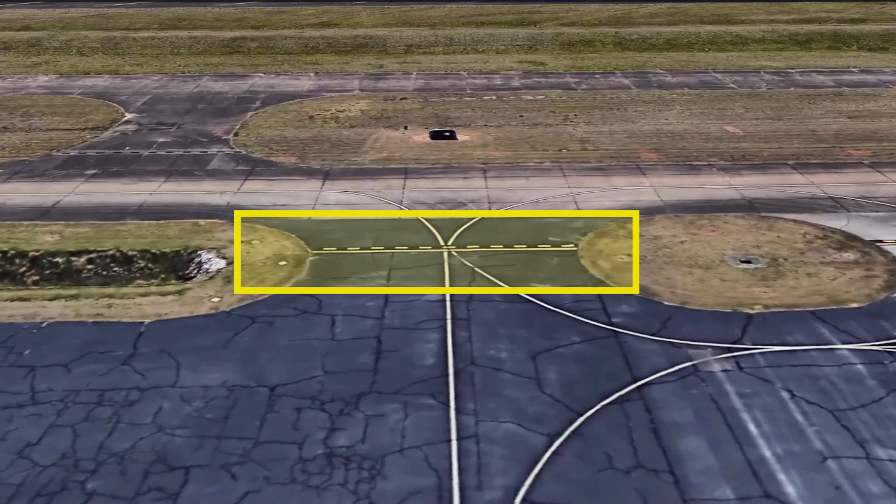Let's start with this one here. So you taxi up, and we'll keep saying this is Taxiway Juliet. What do you have to hear in order to cross that line? You need to initiate the actual action with the ground and get permission. You would need to hear cleared to taxi via Juliet to runway, whatever runway you plan on taking. Correct. They don't typically use the word cleared except for taking off or landing or something similar. But they would say taxi via Juliet, runway 27.

If this were runway 27, I haven't labeled it, but I think that'll make sense from the video. We'll say north is up, so 27 makes sense. So once you're told taxi runway 27 via Juliet, you would read back those instructions, taxi 27 via Juliet, and now you're cleared to taxi up and along. At that point, right, you would have permission to enter that taxiway. Okay. You come up to this marking. It looks like this here. I didn't do the best job drawing it. Can we cross this thing?

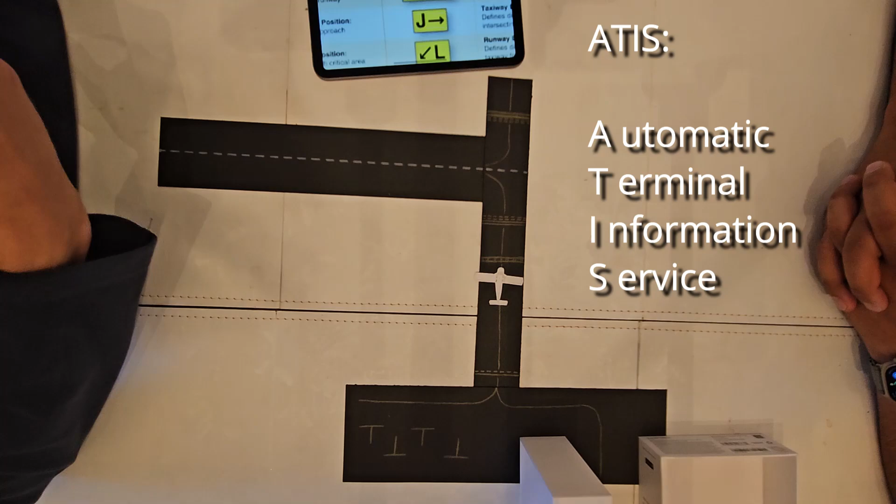No. It depends. Most airports have an ATIS. Stands for Automatic Terminal Information Service. Okay. It's not really automatic. Someone reads it and then it's played on a loop. On a loop. At Donaldson, we don't have one during the day. When the tower's closed, there is an automated AWOS, Automatic Weather Observation System. Though at most controlled tower airports, we do have an ATIS.

And at the very end, they're going to talk about which runways are in use, and then listen if they say visual approach is in use or ILS approach is in use. If you hear that term, ILS approach is in use, you may not cross that line. Okay. Because this is an ILS critical area. The way an ILS works is there's an antenna way down here at the other end of the runway. It sends a beam like this.

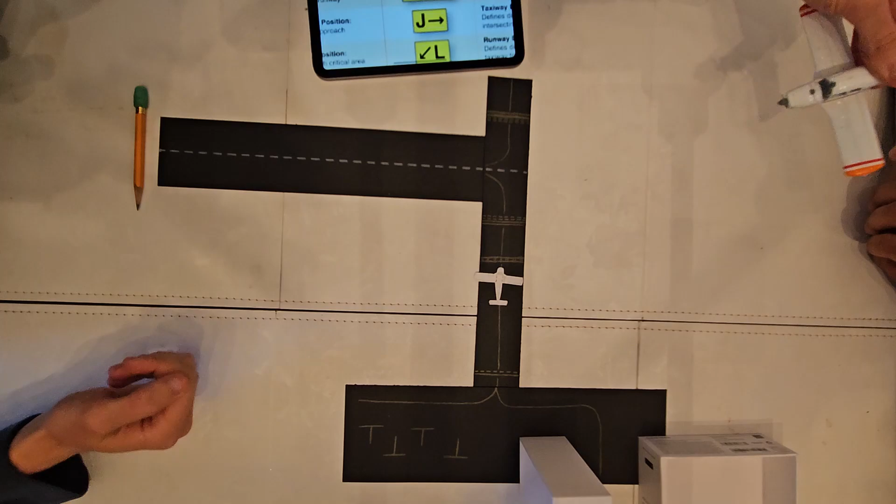So if you have another airplane coming in to land and you were to taxi into this area, your tail fin could block the signal going to them and give really strange readings on their instruments. Oh, wow. That's very interesting. So that's what the ILS critical area is for. But if you do not hear ILS approaches in use, they're not using the ILS. Right. That's interesting. I don't know that I've seen that before. Yeah, they're pretty rare.

I don't see them very often, but Concord does because it has a really long, skinny runway. And remember that this antenna is right here. There's the actual localizer antenna. If you've seen this truss structure at the end of a runway, that's the localizer. And you can see why they might want to put a restriction on that, because that beam is coming this way for the people landing this way.

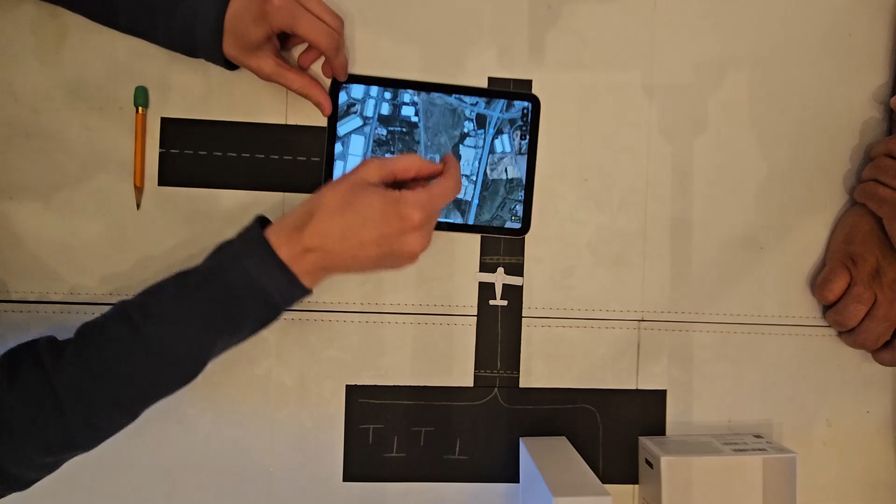I gotcha. So way out here, that beam starts to cross the runway. So an airplane anywhere along here could be a problem if an airliner or someone IFR is trying to land this way. If it's a cloudy day and it's pretty low conditions and you think someone could be using the ILS, it doesn't hurt to ask the tower. Okay. Even if you did not hear ILS approaches in use. Is the ILS typically only on one runway?

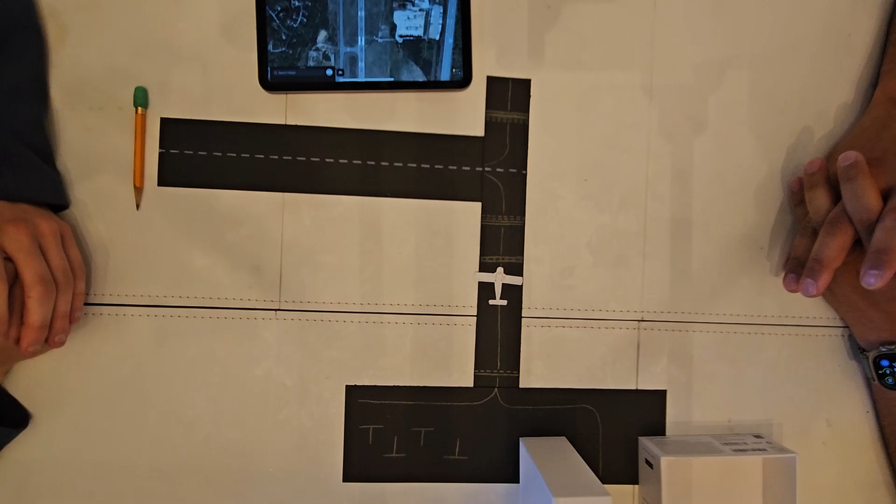It depends. So at Charlotte Douglas, if we go over there, they have them in both directions. There's a localizer antenna there. See all those little things? So that's for this runway, landing south. But they also have one on the north end for landing north. So they have different frequencies and they cross each other, which is kind of cool. That is very cool, depending on your weather and whether or not you would need that. It does depend, but it is nice having an ILS on both runways.

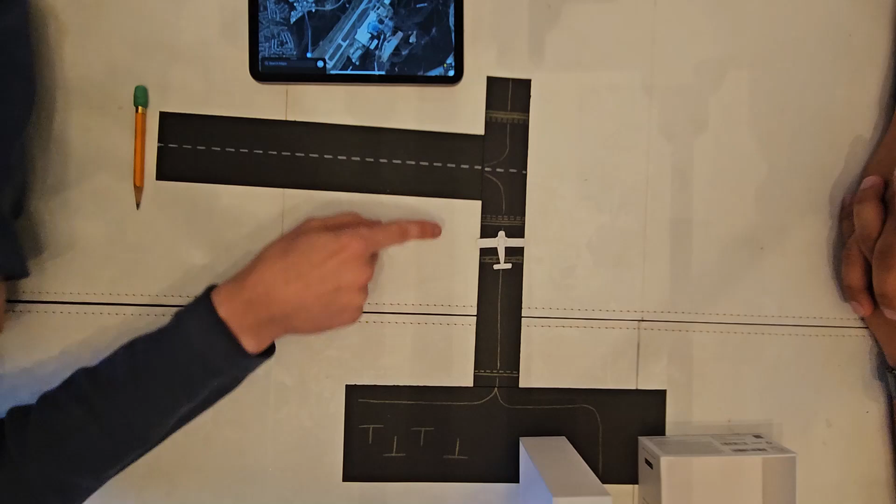Although a lot of these smaller airports that we're flying in and out of just have one. Greenville Downtown only has one. So if the weather is really clear and you do not hear ILS approaches in use, you're fine. You can go right over that ILS critical area. Otherwise, ask. So you're going to hear that on the ATIS, correct? Yes, on the ATIS when you get the weather. You would hear ILS or visual approaches in use, or maybe RNAV approaches in use.

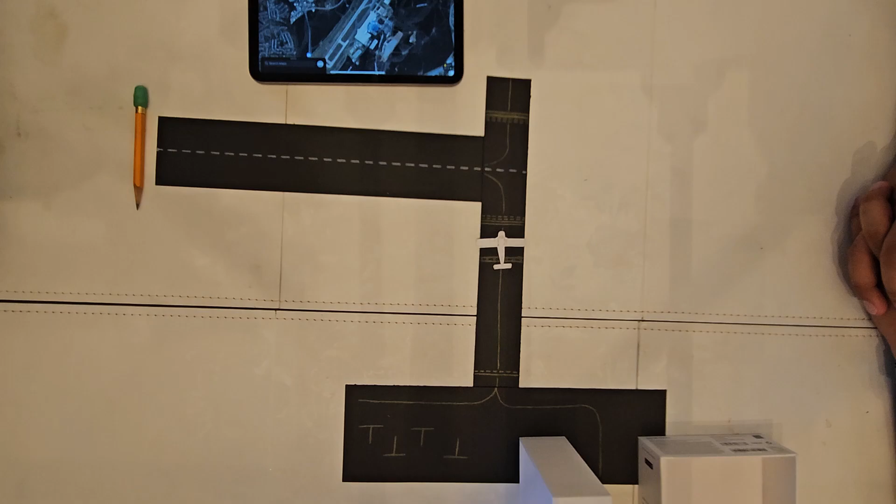If they say RNAV approaches in use, I'd still ask, because that's still instrument things going on. Because even if they're defaulting, that's telling the airplanes that are arriving what to expect. Expect an RNAV approach, but they could still ask for an ILS. And then you being in the ILS critical area could be a problem. So I would just ask if it's instrument conditions or instrument approaches of any sort are happening.

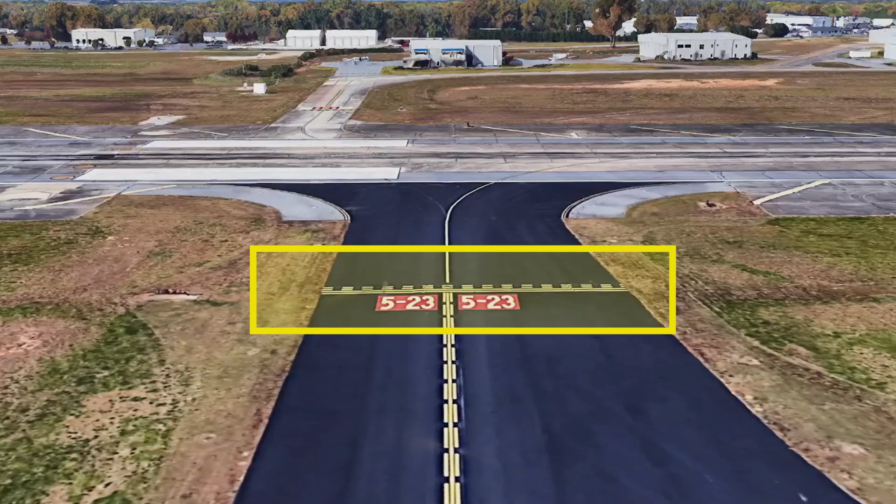We come up to this line. Can we cross that? No. What do we have to hear to cross that? Cleared. Cleared for runway. Very good. The only exception to that would be to cross the runway. If they say cross 23, you are good to go ahead and go across. But if you were going to be on this runway, you need to hear cleared for takeoff or cleared to land, or cross. They all start with C. So if you don't hear cross or cleared, do not touch a runway.

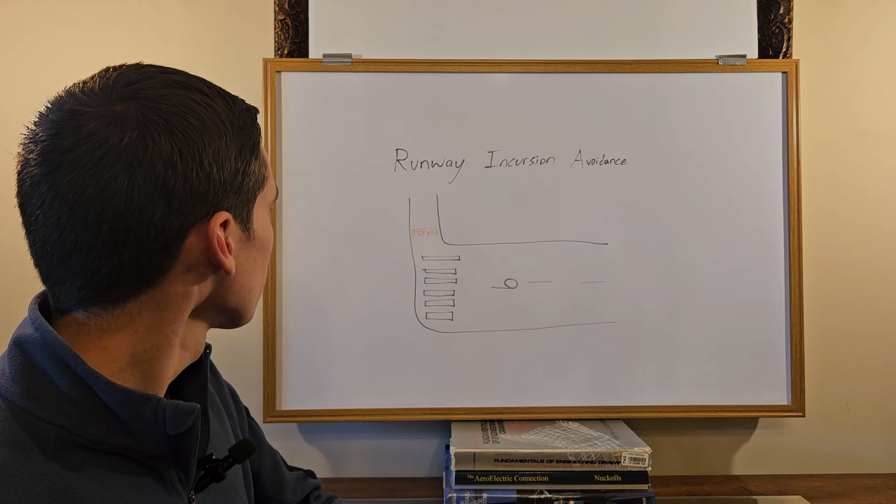Now, one thing I forgot to talk about was a line up and wait clearance. That would be where an aircraft is holding at this position. They call for their takeoff clearance, or maybe the tower clears them. But instead of hearing Cherokee 12345 cleared for takeoff runway 9er, they hear Cherokee 12345 line up and wait runway 9er. This is an interesting clearance that I'm not a huge fan of. I understand how it helps with traffic flow, but be on very high alert, be very careful.

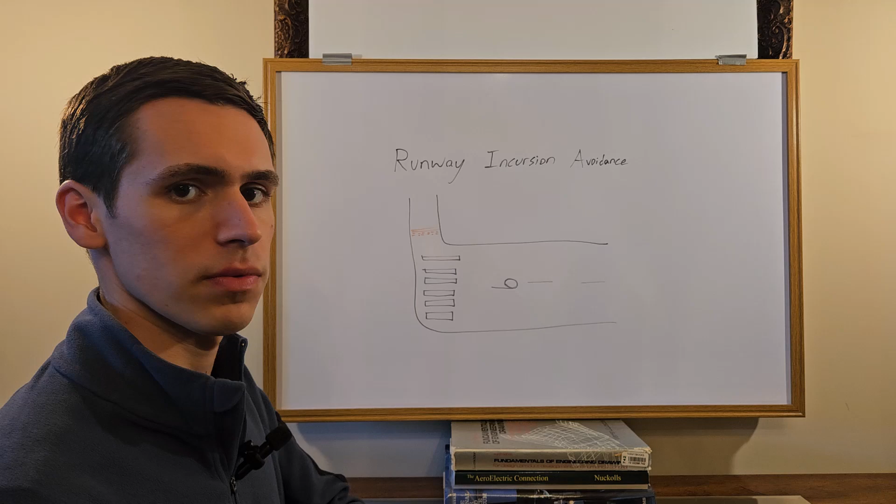What you are expected to do is taxi onto the runway, line up, and then stop. You are not allowed to take off until you receive your cleared for takeoff runway 9er. Until you hear that, you are to stop on that runway and not move. Now, it's rare, but it has happened that an air traffic controller forgets about the aircraft that has been told to line up and wait, and then clears another airplane to land behind them.

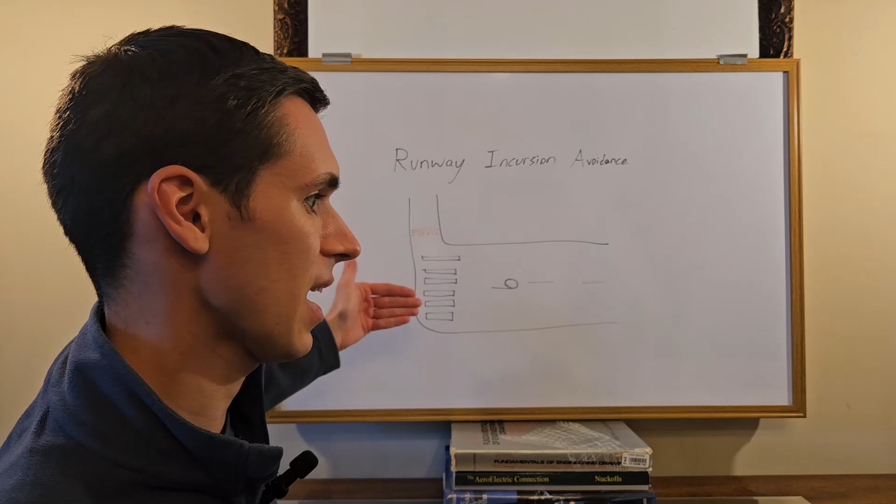When you have been given a line up and wait clearance, look both ways, especially on final. Make sure there are no other airplanes coming in to land. Also pay attention to how long you've been waiting. If you've been sitting there for more than a minute, maybe 2 minutes, it's time to ask the tower what's going on, or just confirm: you want Cherokee 12345 to continue holding on runway 9er?

And this is especially true if you hear someone cleared to land or know that there is someone behind you coming in to land. You might want to get off that runway in a hurry. So just something to be aware of. Have the situational awareness to know that you don't want to be sitting on this runway for too long. And if you've been cleared to line up and wait, just expect a takeoff clearance very soon. If you don't receive it, ask, because that could turn ugly quickly if you don't.

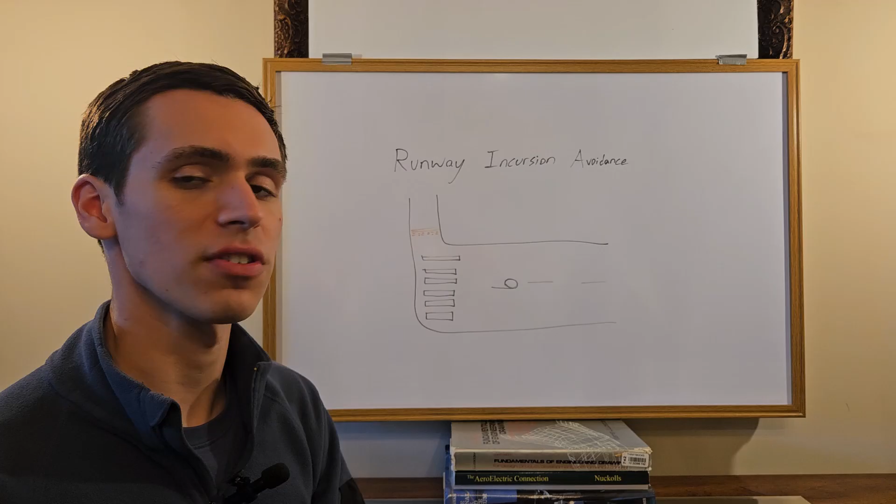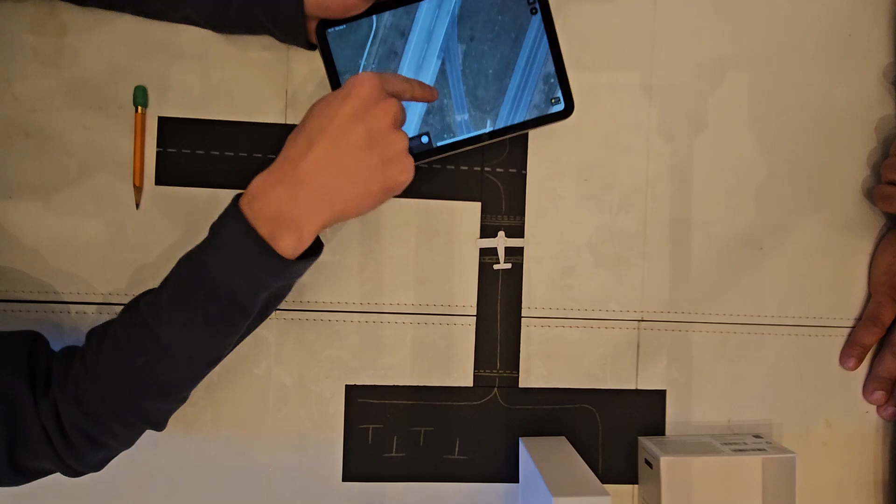And also notice the color changes. We have yellow markings for taxiways and white markings for a runway. So if you're seeing white markings, you're on a runway. So be aware of that. I mean, you can even see it on these here. See, it's all yellow. Yep. Wow, it's crazy. Something you look at all the time, but you don't think about it. No. But it's all there, which is really nice.

Now, technically, the runway starts anytime across this hold short line. So this little bit of the taxiway is still considered part of the runway. You need that cleared for takeoff or cleared to land or cross the runway to be able to enter this part. When you cross a single, you know you're getting onto a taxiway. Okay, yeah. When you cross a double, be double alert because you're getting onto a runway. Got it. Those are the 3 levels of security at an airport, at least as far as clearances are concerned.

Ramps are pretty much uncontrolled in the U.S. So you can taxi around, run your engine, whatever you want on a ramp. You're pretty much fine. Just, obviously not illegal things, but you get what I'm saying.

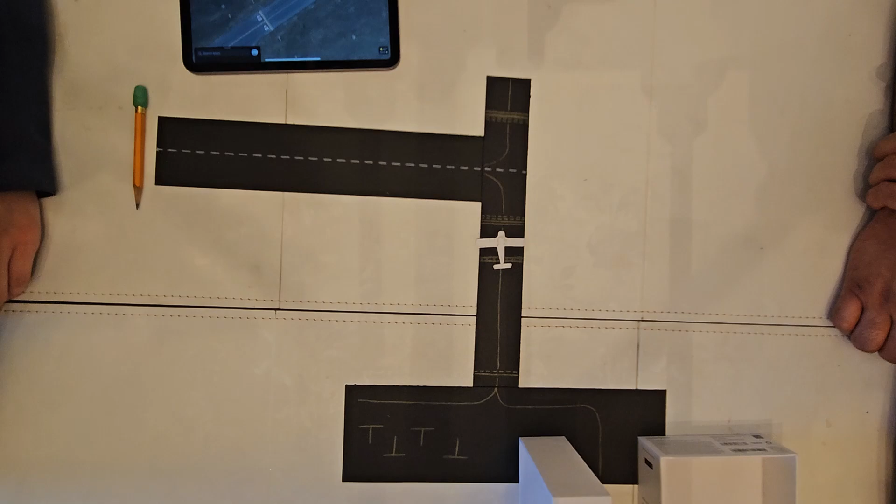Apparently, in some other countries, it is not that way. I had a pilot come and fly with me who did her ratings in one of the Caribbean islands. I don't know which one. But you had to have clearance to start your engine. You had to turn on the avionics and battery, call the tower, ask for permission to start your engine on the ramp before you could do it. Oh, wow. That kind of takes the fun out of it. It does a little bit. But in the U.S., no, that is not the case. You can go ahead and start your engine whenever you like, pretty much. Just make sure there's no one in the way of the propeller or behind you. Things like that, but that's for another. As far as clearances are concerned, you're good on a ramp.

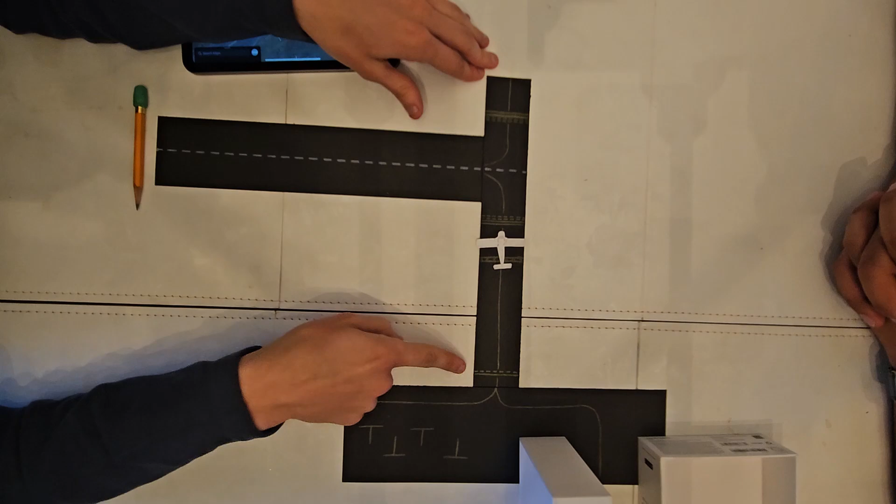It's uncontrolled, pretty much. Now, as soon as you cross this line, you are now on a taxiway. In a taxiway, you do have to have permission to be there. And just tell the tower what you're doing. If you just want to taxi around for practice, you can tell them that. Hey, I'd like some taxi practice. I just want to taxi up this taxiway and then back down. They can say no, but a taxiway is lower stress than a runway. So we're cleared for takeoff. Now we're allowed to taxi onto this. And we take off. Okay.

When we are cleared to land, we're allowed to land, and let's say we land this way. Do I need clearance to cross the dotted side of a hold short line? No, you do not. You need to get off that runway as quickly as possible after you land because it's a secured area. You were cleared to land, and now that you have landed, get off the runway. You're at the limit of your clearance, so to speak. And make sure the entire plane is across that line. A lot of people will stop with their tail still sticking over. Well, I'm across the line. Yes, in the cockpit you might be across the line, but if any part of the plane is still over that line, that's a problem. So you need to get across the rest of the way.

One of the best things you can do is tell them before you land where you're going. Okay. Please don't be the guy who lands at an airport. I'm going to... I don't know where I'm going. Where can I get fuel here? I've heard it happen too many times.

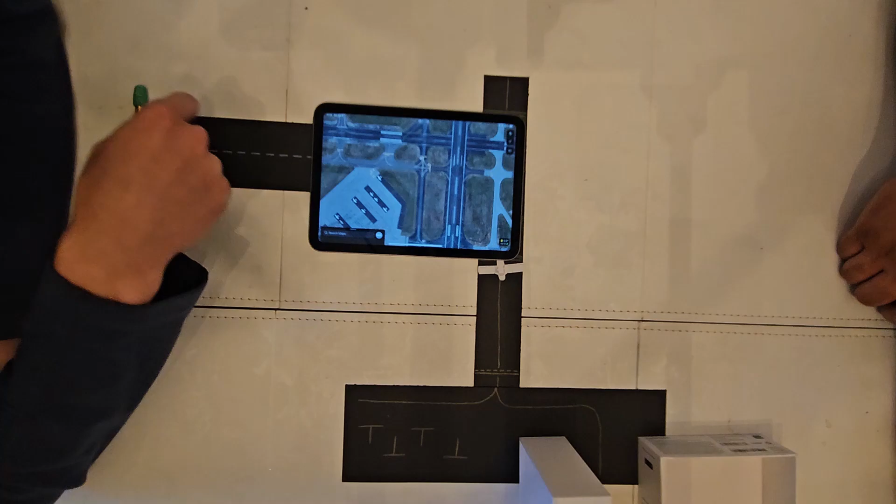Please don't be that guy. Get off the runway. Know if you're going to turn right or left at the very least. Know if you're making a right or left turn. Fuel at the Greenville Downtown Airport is almost exclusively on the west side. Okay. So if you're landing 19, you should be making a right turn at the very least.

The other thing you can do in ForeFlight, go to FBOs. Those are your fixed-base operators. That could be people where you get fuel, maintenance. There's a lot of options here. So Above and Beyond, that's a maintenance place. PF Flyers, they do avionics. Oh, it's there. Special Services, they do maintenance. Touch and Go does maintenance. That's a flight school. There's a flight school. But know which one you're going to, and there are your options.

Now, a lot of people know that there's a restaurant at the downtown airport. I heard about that. But you don't see it listed here. So that's where you're going to need to pull out your Apple or Google Maps and Google, where is the restaurant? Know what part of the airport it's on. Right. And then it's a good start. Plan your taxi route accordingly. The restaurant at the Greenville Downtown Airport is right here. So looking at it with north up, that's in the bottom left corner.

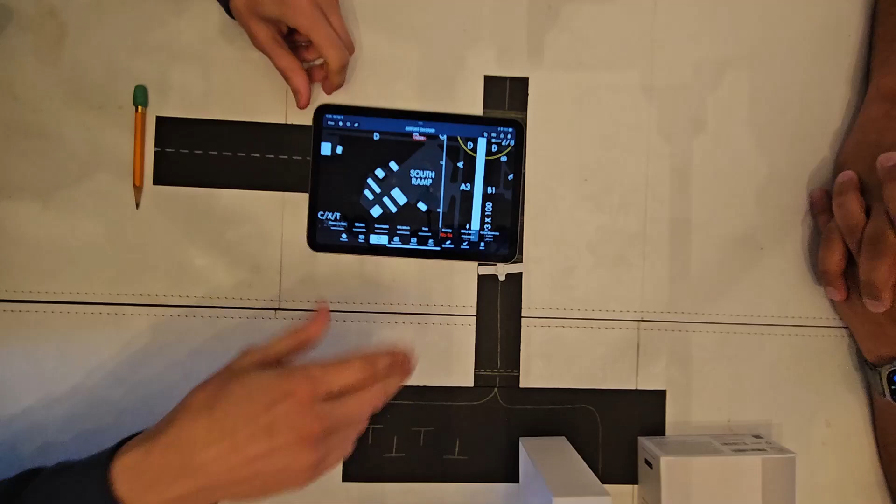Okay, let's go over to the airport diagram and see if we can find it. Bottom left corner. It's probably going to be on the south ramp. I can at least narrow it down. Figure that much out. It is that building right there. Right. It should be marked for how many people fly into downtown to go to the restaurants.

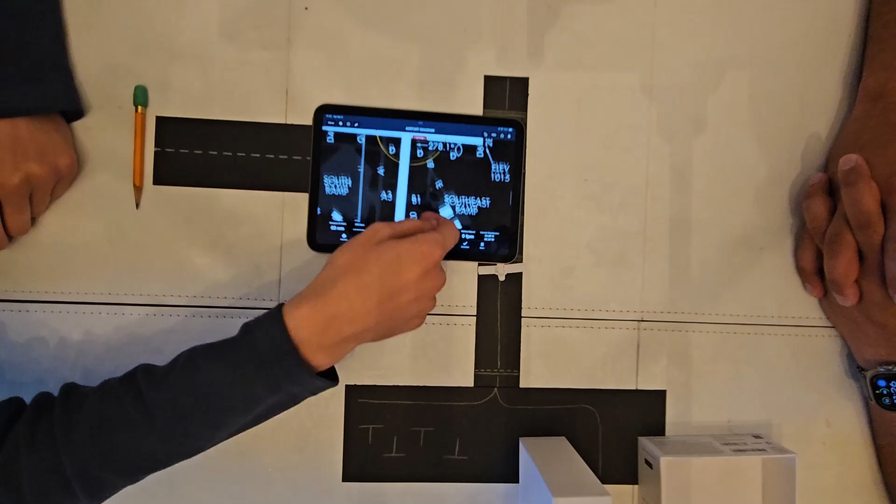Have a basic idea of where it is so that you can get off the runway on the correct side. If you're landing 19, it is the right side, but if you're landing 1, it is the left side. Okay. Don't turn off right landing runway 1 and be over here at the southeast ramp. I need to get to the restaurant. Oh, no. You have to be taxied around, across the runway. It's just waiting for the long line of airplanes to land who are also going to the restaurant, lining up behind you, also turning off the runway. Just, oh, man. Don't be that guy.

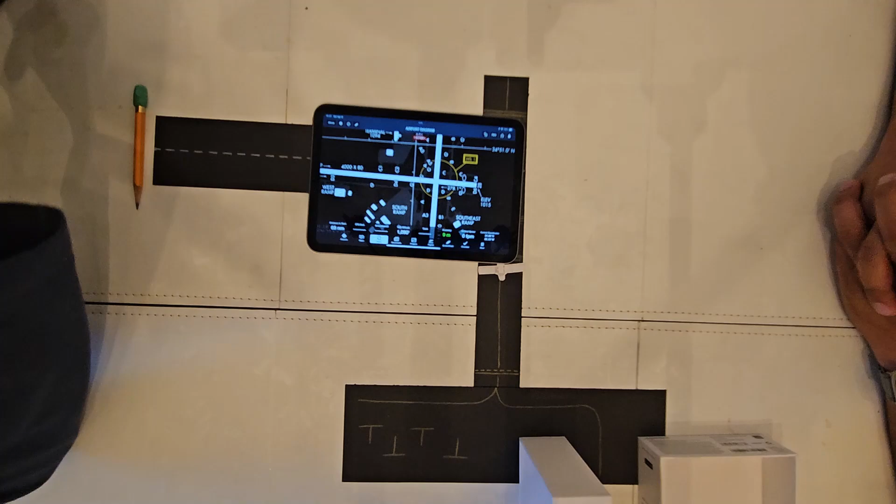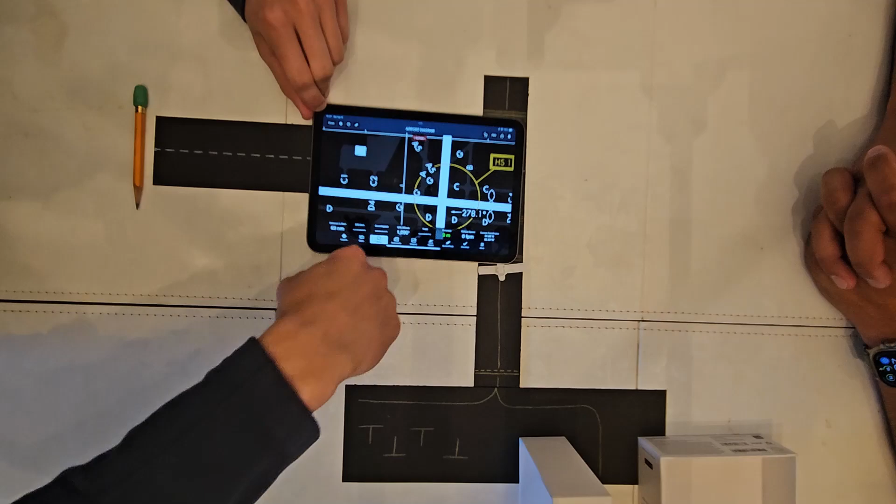Now, I see something else interesting on here. There's this HS1, and they're circling this. HS stands for hotspot. It is a place where there is a history of frequent confusion. Runway incursions or wrong taxiway events are frequent in hotspots. For example, people being told to take taxiway Golf might take Alpha 5, because taxiway Golf is a pretty hard turn. You're taking Alpha 5 and then it's a hard left on Golf. Right. But you could see how someone would be confused to see the Golf sign and just keep going straight into the jet center, when really they want to take Golf this way.

Another thing I've seen people do is land, told to make a left on Delta, but they make their left turn on the runway. Oh, man. Don't do that. That is a runway incursion. Follow a yellow line off the runway. Okay. If you don't see a yellow leadoff line, it's probably not a taxiway that you're seeing, especially if it has white lines. Oh, no.

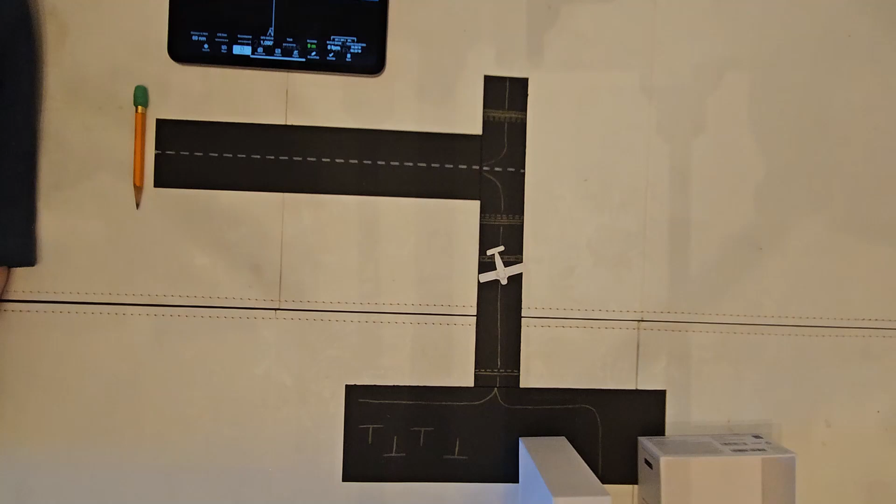I did have one student who, in one very specific situation, made that mistake because I had taught him only to follow the yellow lines. It had just poured rain. The rain was gone, it was good, but the sun was setting. So the light was reflecting off the water and you could not see a single mark on the ground. So that's where I failed as an instructor, because I didn't give alternative ways that would work in all situations. So we learned from that, and use your signs too. So you see the yellow Delta sign, you're going to turn at the next immediate turn just after that sign.

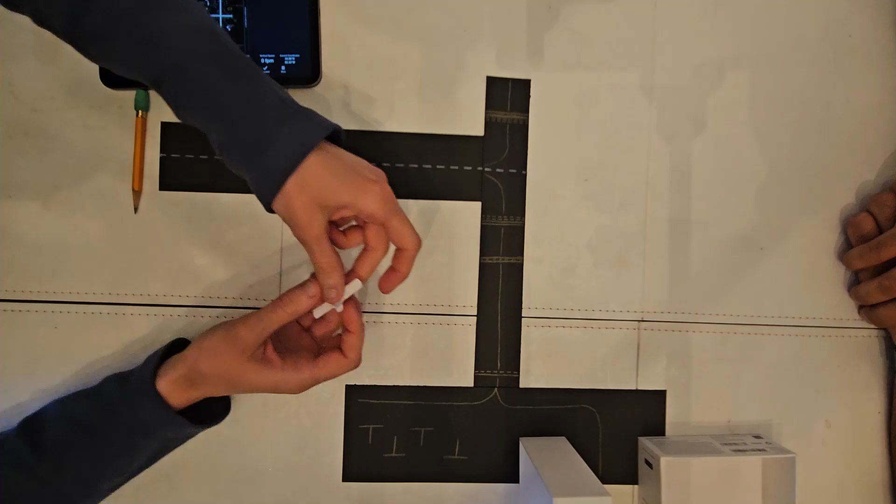That's a lot of the rules there. Don't cross a solid line unless you are absolutely sure that you have permission to do it, or ILS approaches aren't in use in the case of the ILS critical area. But when it comes to getting off the runway, get off as quickly as possible, and then stop the airplane and figure out where you're going and get your clearance to go to the ramp.

Okay, so let's go over some of these. So we have this sign here that says 4 and 2-2. So if we have a runway in front of us, and then the taxiway as well, we're coming off the ramp.

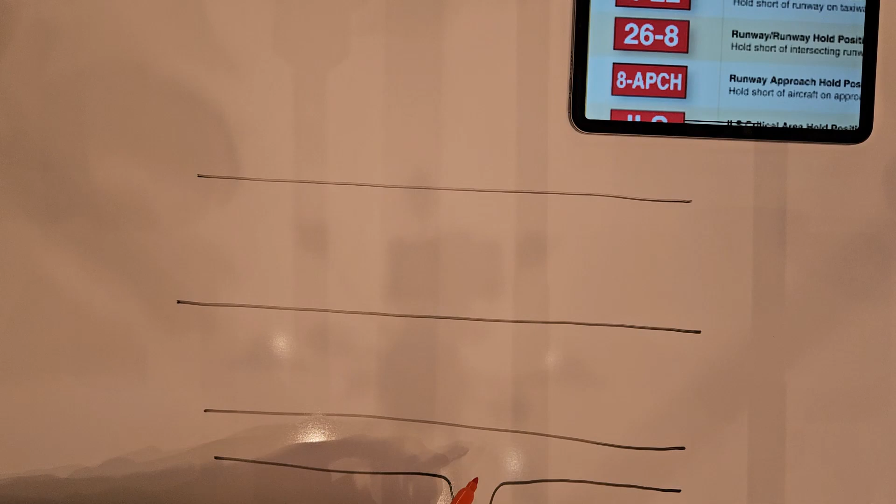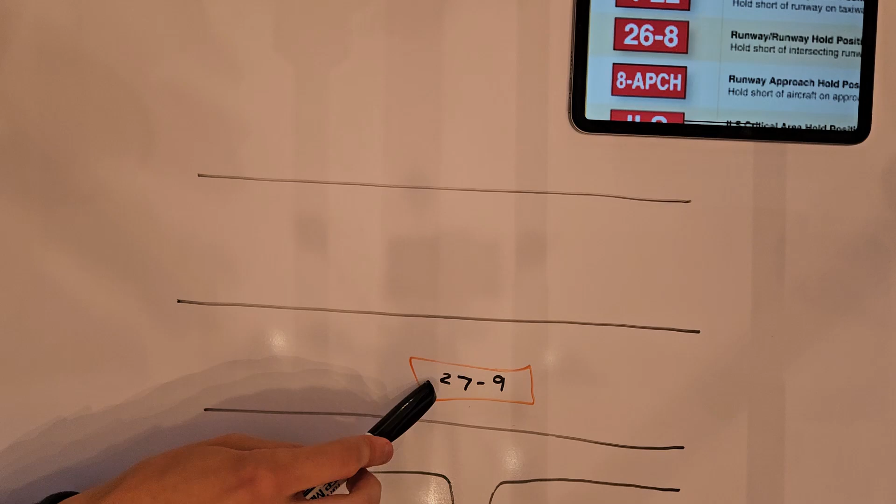And I'll use orange just because it's very hard to see yellow on a white background. It's a very light color. Which way are you going to turn if you're told to taxi to runway niner? We'll be making a right turn on whatever taxiway that is. They always put the runway number on the side of the sign where you need to go. So if it's a right turn to go to 9, you'll make a right turn, and they'll put the 9 on the right side. And if the 27 is on the left side, you know it's a left turn to go to 27. So it's not always written in numerical order. It's written in the way that you'd want to turn to go there.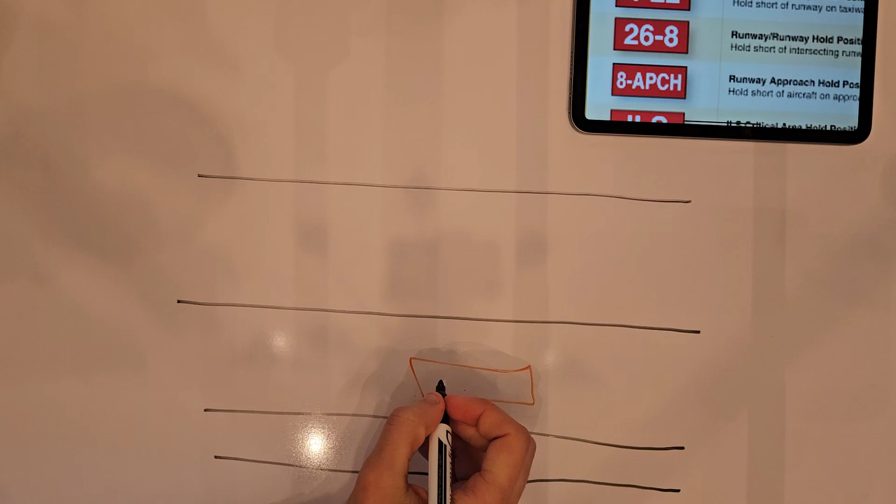Okay. All right, what if we saw it looked like this? There we go. That's a yellow sign. What does that mean? 27 left and right. That is something that I have not ever had to. I've heard it before, but I'm not familiar with what that means. That's fine. That's exactly what that dot means. And both of those runways are that direction. It'd be a left turn to go to 27 left or 27 right. Okay. So there's 2 runways in that direction. What is that? Just if you can do a...

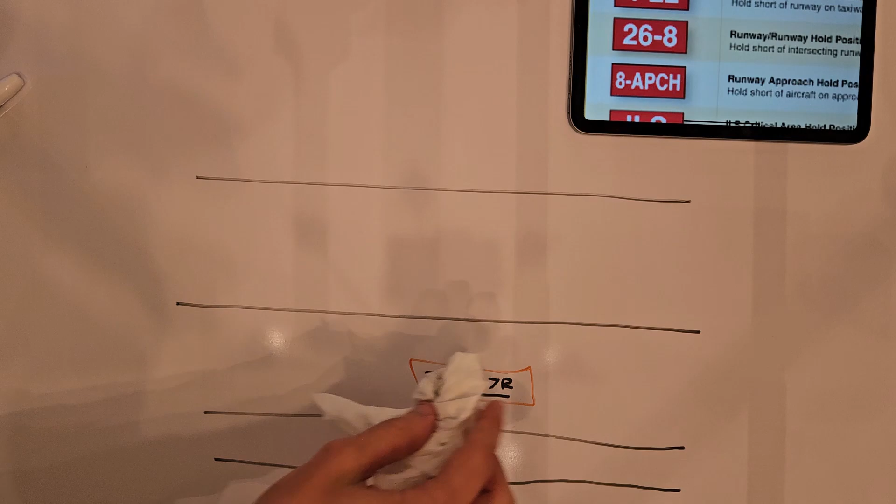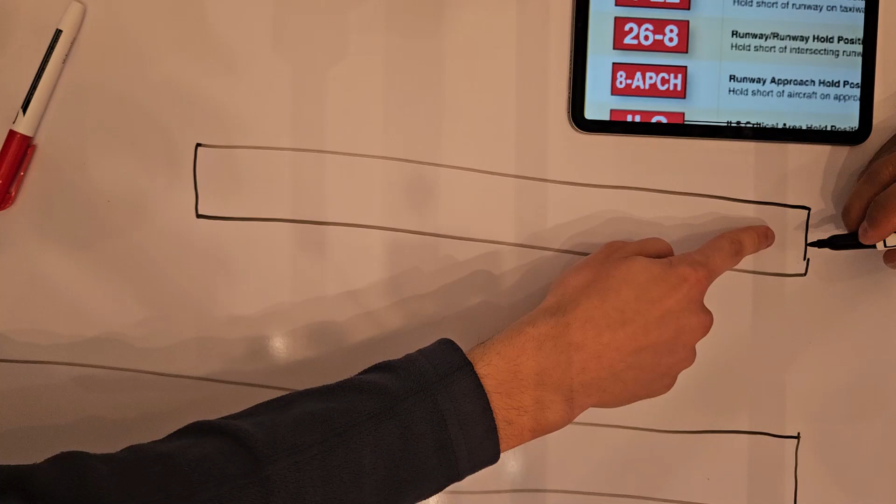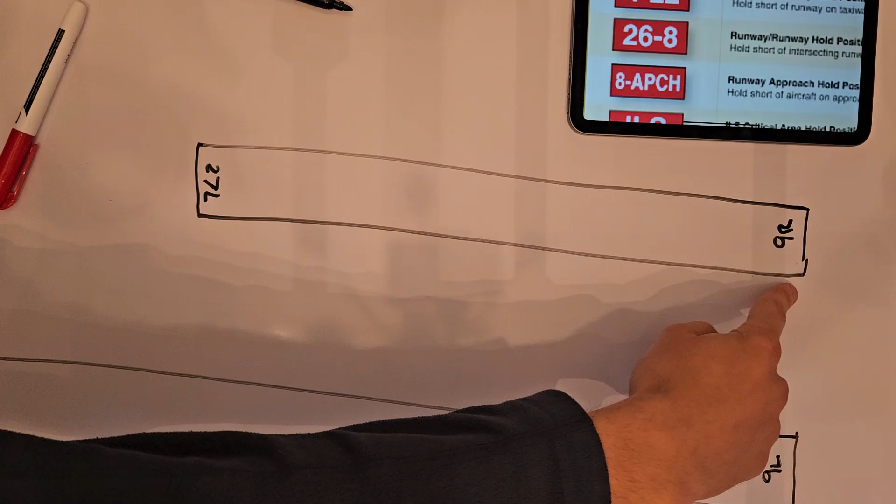Oh yeah, let's talk about parallel runways. That's a lot of fun. Okay, so it is parallel. They're not always exactly the same size. Sometimes they vary in size. Could you write number 9 on there? And would that be left or right? This would be right. That'd be 9 right. Very good. So you can do an R. What about this one? This would be 9 left. Very good. I'll take that. Now this would be 27 right or left. This one? This would be 27 left and 27 right. Correct. So it's whichever way you are looking at it from. So 27 left and 9 right are the same piece of pavement, which is fun.

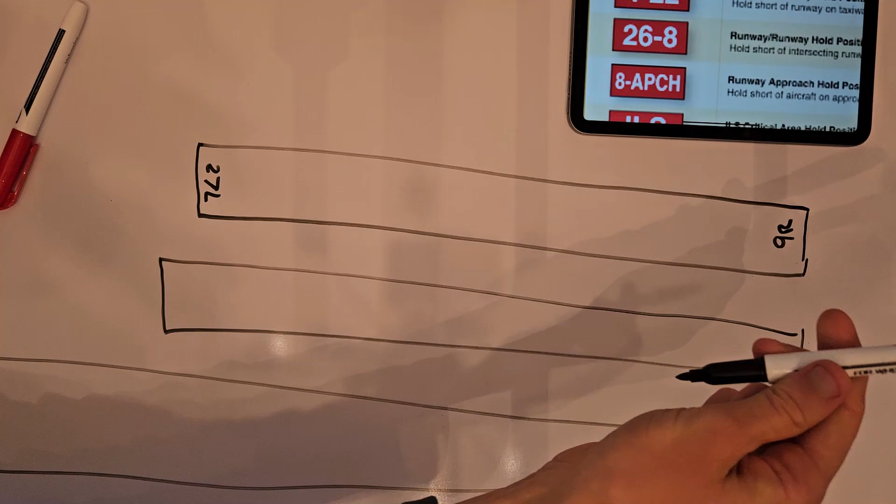Okay. What if they had a third runway down the middle? What would that one be numbered? I'm going to assume just the runway numbers. It'd be 9C for center. I should have guessed that. It's all right. And then we have 27 center. So that one's easier than the left and right.

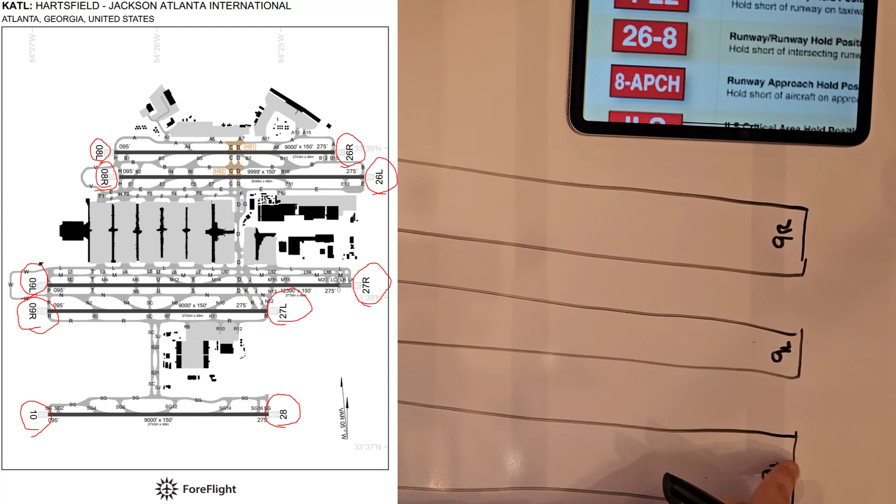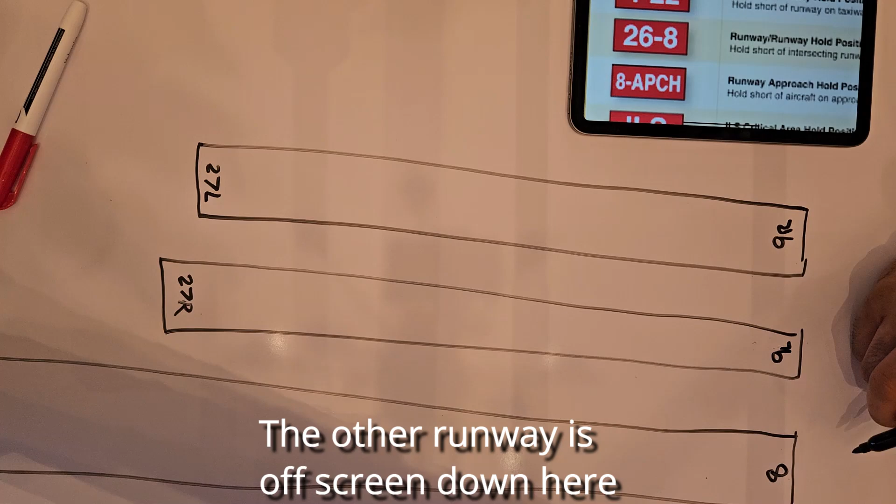Now, if they had a fourth runway, what they would do in this case for runway numbering, this is starting to get really confusing. Right. So instead of doing a center, that would be 9 left. Oh my goodness. But then what they would do is even though they're the same, they'd make this be runway 10 or 8. And then this one would be the reverse of that. Let's make a runway 8. That is interesting. So even though the runway number should align, that'd be 8 right, and that'd be 8 left. Oh, it would be? Yes. Because that's the right one that's 8. That's the left one that's 8. So even though runway number is supposed to align with the direction, they will purposely number it 1 plus or minus just to eliminate the confusion. So that you can know exactly which runway you're landing on, and it'll match up.

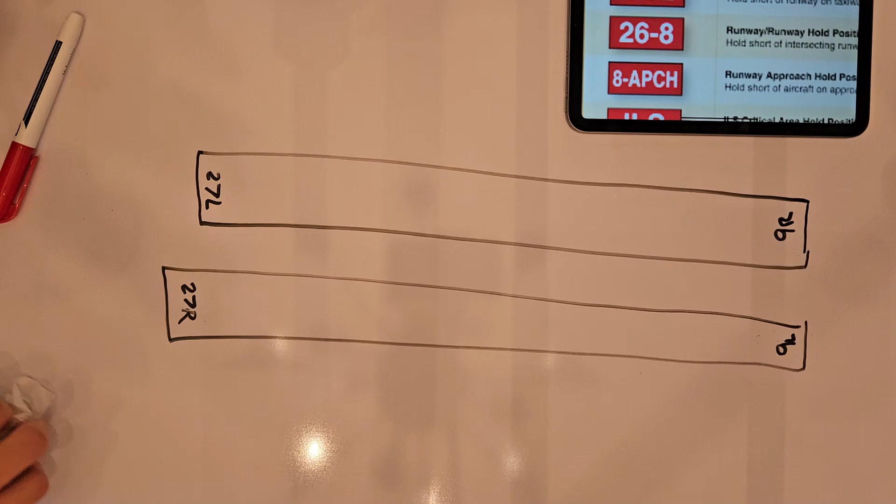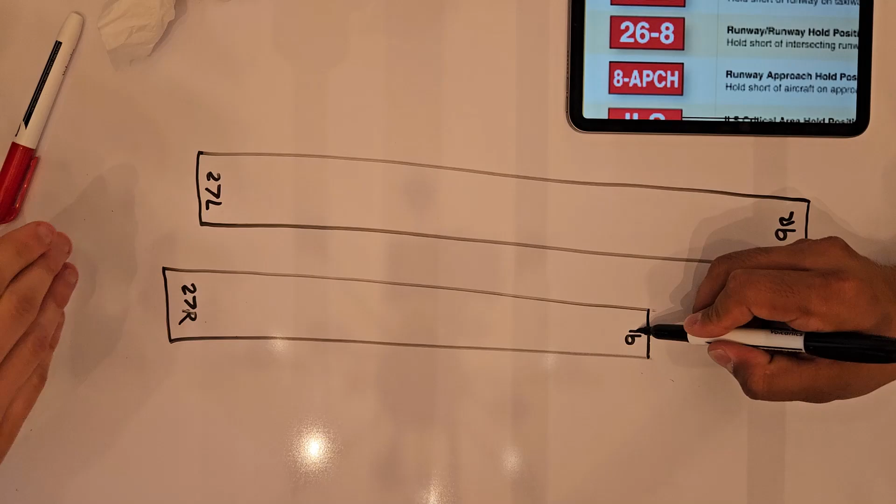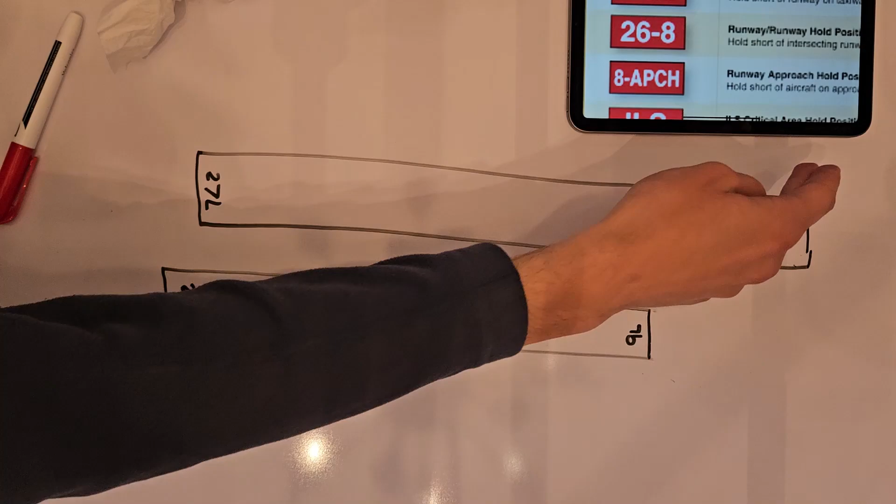Do you know what statistically is the highest risk of a runway incursion configuration? Runways that cross each other? That, for me, I would think so as well. But statistically, it is offset parallels, where this runway threshold is a different spot than this one. So this would still be 9 left. But because the thresholds are offset for whatever reason, this statistically causes a lot of wrong surface events. Because maybe you don't even see this runway. You think it looks like a taxiway because it's farther ahead. I gotcha. So you line up with this one thinking the taxiway next to it is a runway. Correct. Especially if you're coming from this side of the...

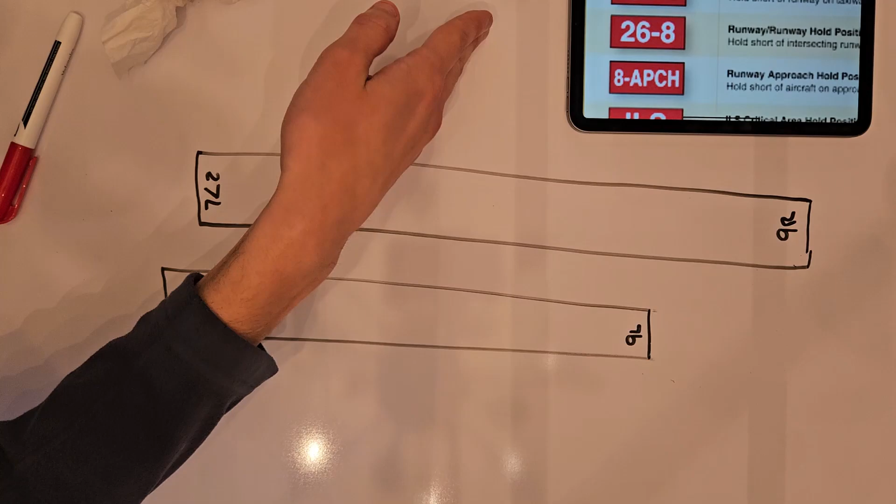Yes. Which brings me to another, not really a runway incursion, but very high risk situation where you mistake a taxiway for a runway. What if at night the lights were turned off on this runway? You were told to land 9 left. You only see one runway. Your mind will fill in the blanks, even though it's blue taxiway lights over here. Or sorry, if you were told to land 9 right. Right. You'll see that taxiway as 9 right. Exactly. Even though the lights were off on this one. Wow. So just be prepared for that.

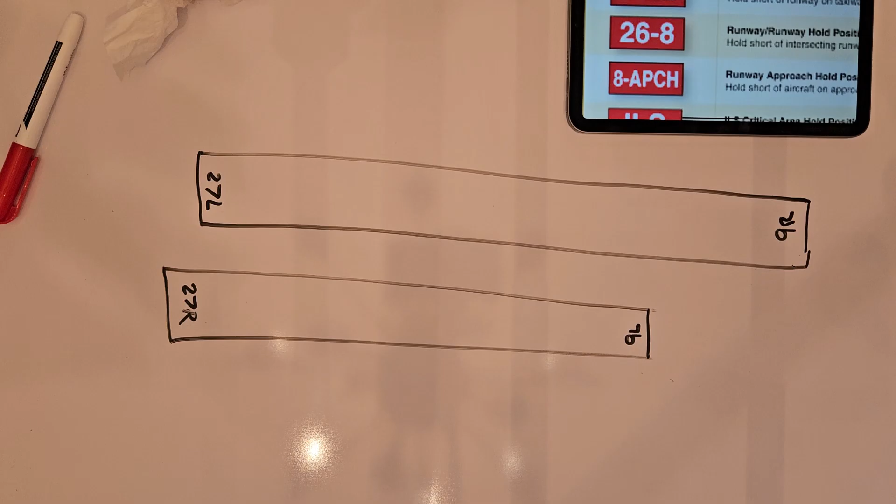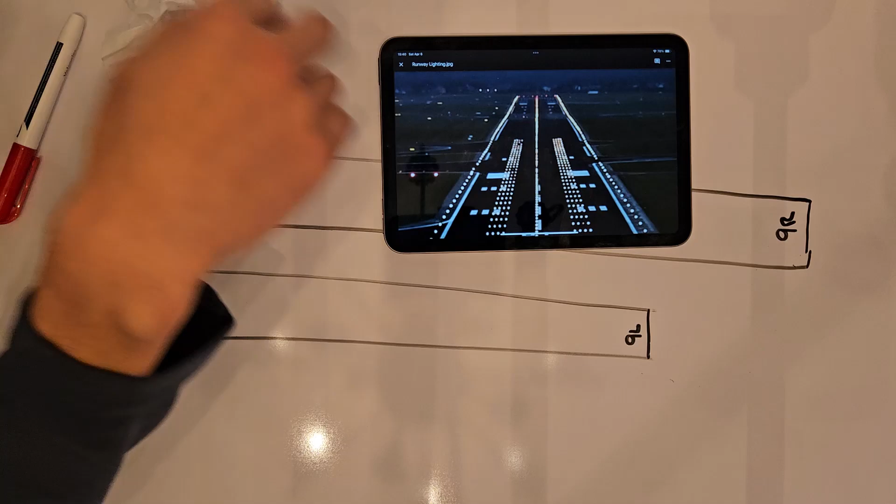Does that, what does that signify? The end of the runway? 2,000 feet remaining. When it goes from white to amber. Okay. So for a really short runway, most of the lights might be amber. Or all of them. But just know that when the color changes, like way down here, that's where you're running out of runway. And it'll be the opposite the other way.

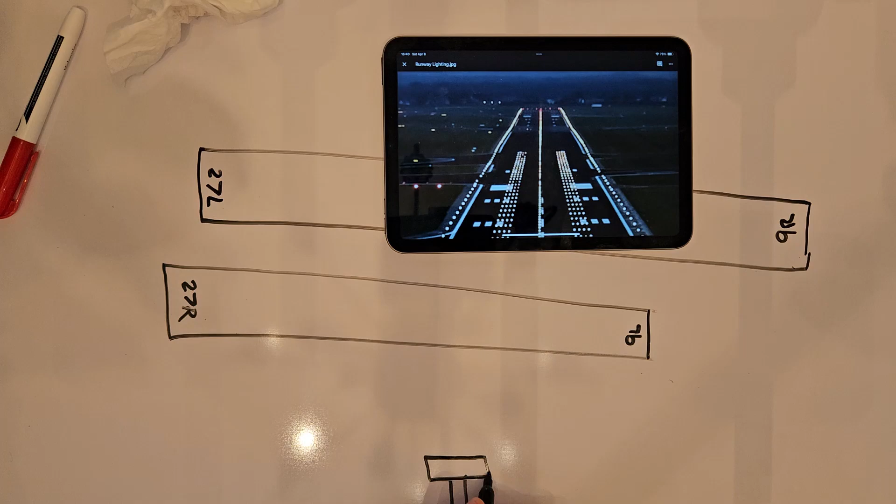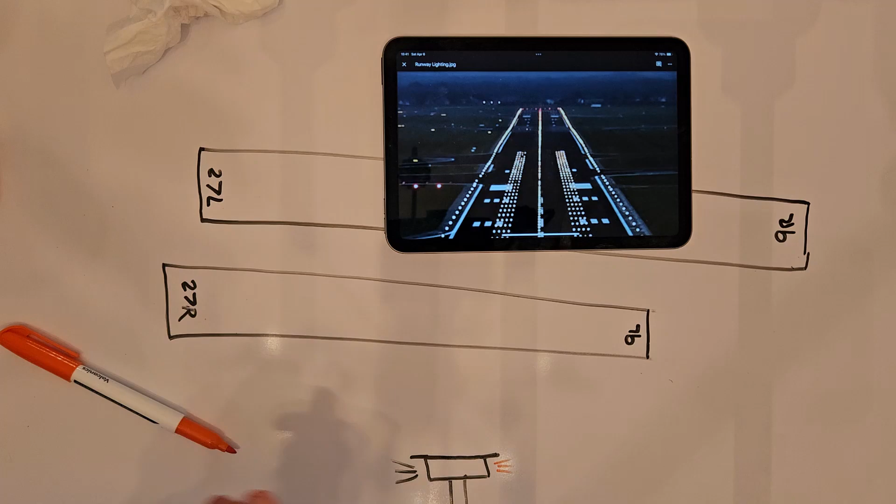These lights, if you actually looked at them, they sit on a pole. They have a little cover on them with almost like a little hood to kind of keep the rain and things out. And they'll have a bulb that is white on one side if you're landing this way, where you have lots of room, and amber on the other. I gotcha. Okay. So it's the same light, but it's a different color depending on which direction you look at it. Correct.

But because all these lights are like this, you can't see them from the side. So when you're flying your downwind leg, it's actually really hard to see an airport because you can't see the runway lights. They're directional lights. They only shine this way and this way. But if you're looking at the runway from this way, you can't see it. Wow, I don't know that I've encountered that yet. When we fly at night, we will.

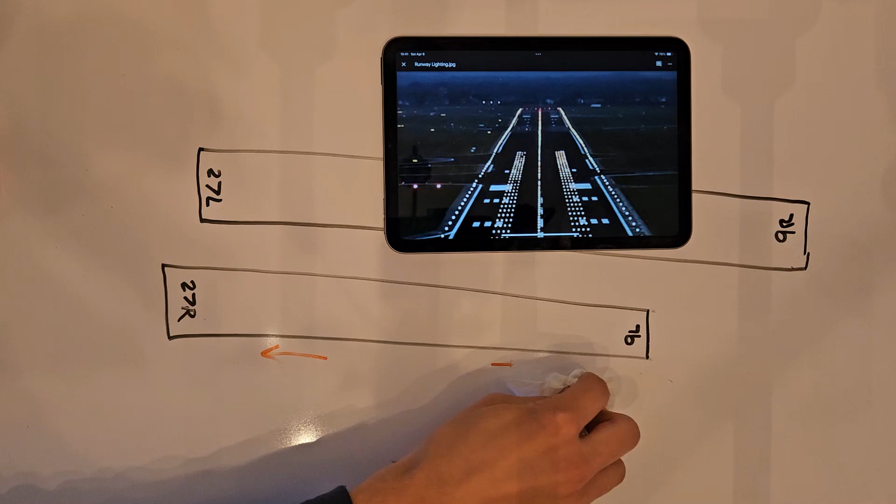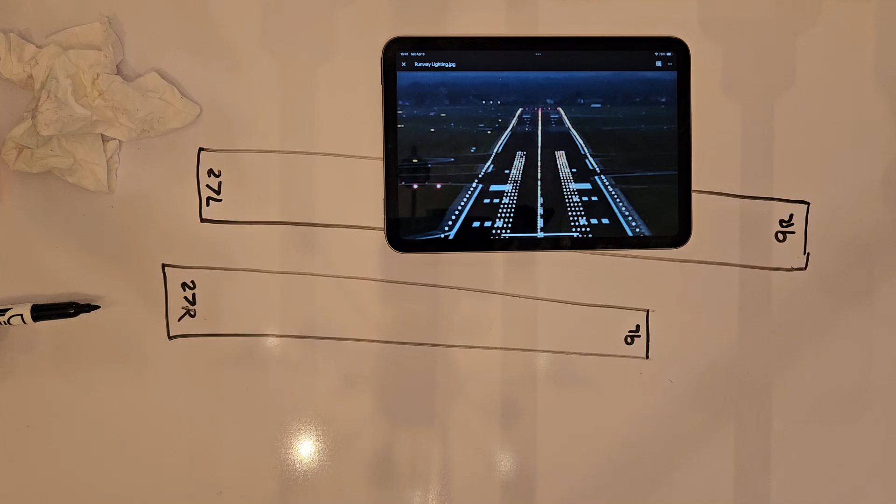So it's actually easier to use the taxiways that parallel the runway to align yourself with the runway. Okay. The blue lights are omnidirectional. You can see them in any direction. And we'll get to more of that when we cover night flying. But just something to be aware of there, and what the colors of the lights mean at night.

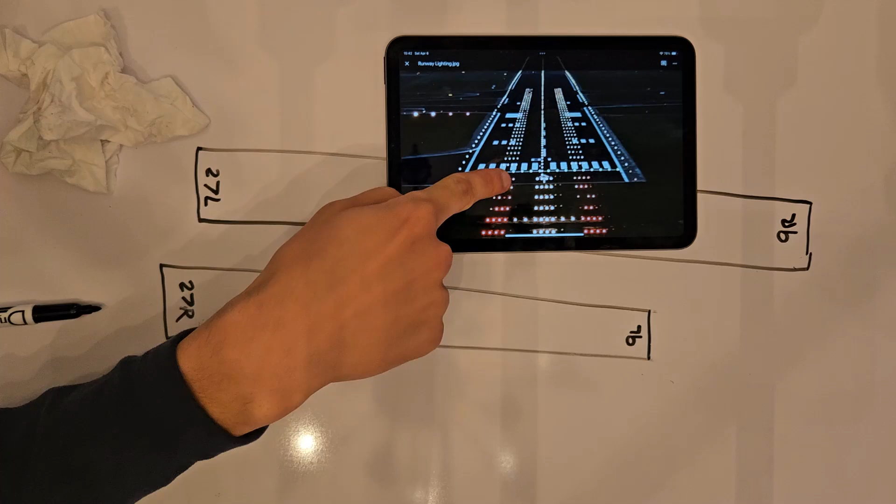Another thing to be aware of, see these lights on the sides? Yes. Not too many airports that I've flown at have them. Runway status lights is what they're called. If they're white like this, that's fine. They clear you to land, you're good. But if those lights suddenly turn red, go around immediately.

This system has detected that there is another airplane either lined up with the runway or on the runway that shouldn't be there. And even if air traffic control tells you to continue your landing, unless they specifically say those lights are inoperative or they're getting false readings, go around anyways. Wow. Now, that said, if they were red and then they turned to white, the lights being white is not clearance to land. Right. They are never a replacement for a clearance, but they can cancel a clearance. Gotcha. Does that make sense?

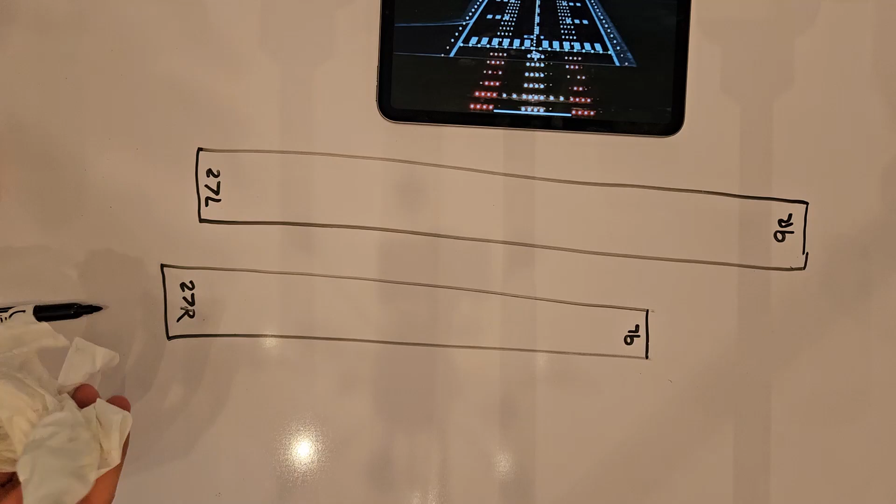Absolutely. They're just there as an extra layer of protection. Right. If they turn red, all bets are off. Your clearance is canceled until tower tells you otherwise. Okay. Whether that's takeoff or landing. There we go. So that's runway status lights. We don't see them too often, but just be aware that if you have a bunch of lights that suddenly turn red on you, you might want to reconsider some choices.

And that one, it's the same in driving. Don't go there. If it says do not, the white circle with the white line on the red background, you can't enter there. Where would you typically see those? What's a good example for that? I don't know if they have them there, but a place where you would see them at Donaldson. See this little road right here? This is for vehicles. You might see one of those no entry signs on this road here. Okay. So that an airplane doesn't try to taxi on this tiny little vehicle access road. That would be the place you might see them. Or, whoa, did not want to do that.

Or say this fence weren't here, and this taxiway continued onto a roadway. There would be a no entry sign, so airplanes know not to go out here. That would be bad. Okay. That would cause some confusion, to say the least. They don't want the vehicles and airplanes mixing too much.

Yes, people can drive on the ramp, get their car out. There's like vehicle access gates, but the airplanes have right of way in that case. But we don't want the people who have driven out onto the ramp... No, they had to get a code. They've probably been briefed on the airport procedures for driving on the ramp, but you don't want the airplanes getting into the places meant for cars only. Cars are a little bit more maneuverable than an airplane in most cases.

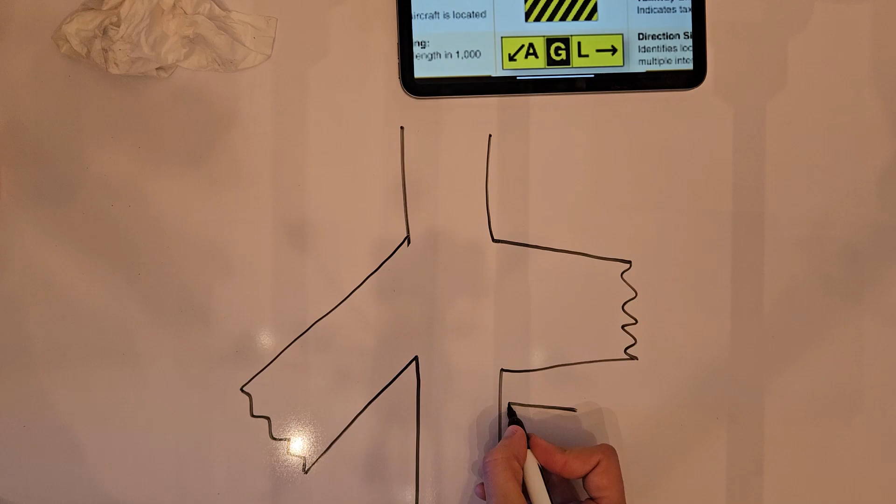I agree. You would see this sign maybe right here. Yep. And it would be a yellow background there, yellow background there. Again, I'm using orange because yellow doesn't show up well. Here's a G for golf in yellow letters on the black background. And then we have Alpha going that way and Lima going that way. So if you see this sign, remember, a black background, yellow letters, is a "you are here" sign. Yep. You are on golf right now if you see this sign.

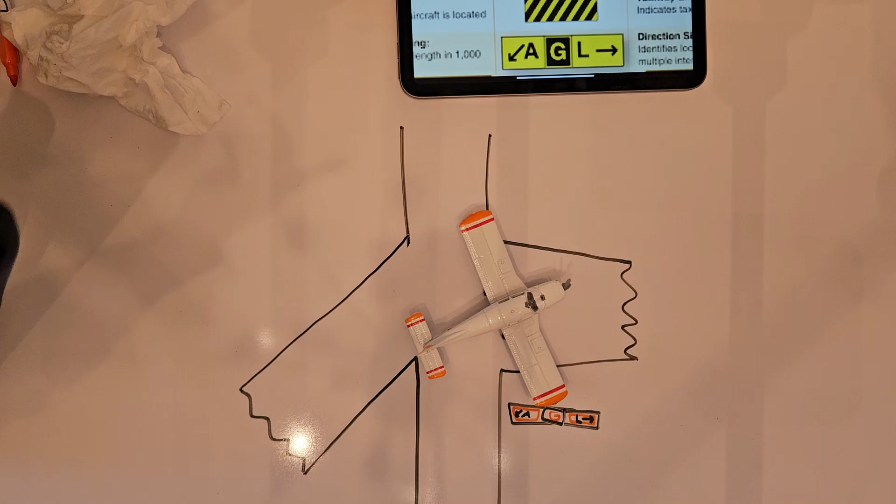What does that sign mean? Telling you that this would be taxiway Lima. Good. And when you turn on to Lima, what kind of sign do you think you'd see? You would see a yellow L with a black background, because now you're on Lima. Excellent. Correct. Okay. Where's taxiway Alpha? Taxiway Alpha is going that direction. This one. Good. How about this taxiway up here? That's still golf. Still golf.

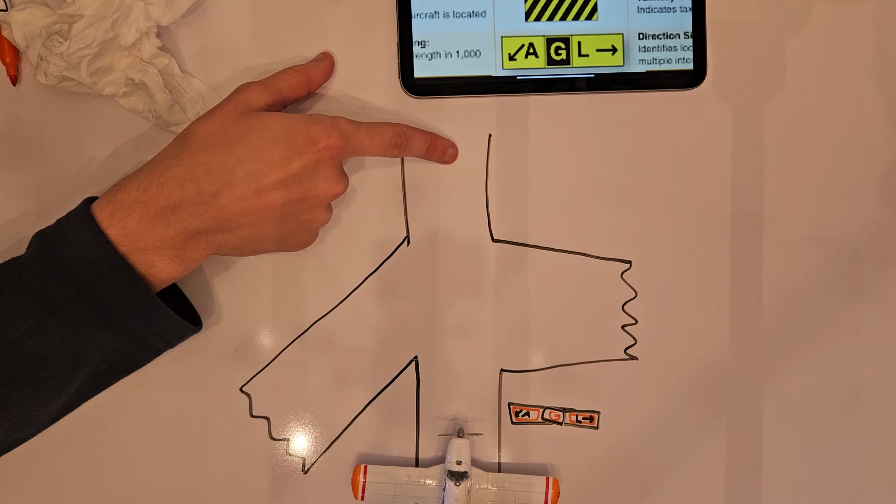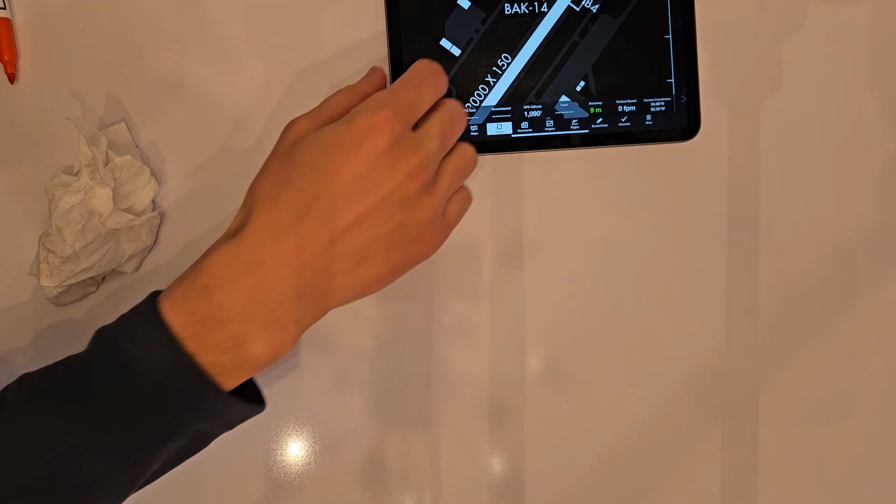What's that? That is arresting gear. Oh, okay. For airplanes with tail hooks, because they have military aircraft doing things here at Donaldson. If you know that it's going on in the area, and you hear Tower say that the arresting gear has been retracted, or they're doing tests of it, make sure it's retracted when you're landing in your airplane. Right. That does not have a tail hook. Because that arresting wire will forcibly remove your wheels, which you might not want. No. That would not be a fun day. It'd pretty much get clotheslined. It would clothesline your wheels right off.

Just a few miscellaneous things to go over. Taxi speed. You don't have a GPS readout on your plane, but a lot of them do. The FAA recommends a brisk walk. Do not taxi faster than that, but that's subjective and hard to tell when you're sitting up in a plane. My number is 13 knots. Okay. Your ground speed reading should not say more than 13 knots. Got it. If it does, you're taxiing way too quick. And I don't think I could briskly walk at 13 knots. I don't know if I could sprint at 13 knots. That is the fastest speed I would consider reasonable. Okay. Anything past that, there's no reason.

What are you doing? What are some things that might be acceptable to be doing while taxiing? Can we be going through checklists and setting up our GPS and all that fun stuff? I would say no. I would say you'd need to get as much of those tasks done before the aircraft is moving. But there are things that you can confirm if you're following a flow to make sure that you have those things done. I would say that's an excellent answer. I really like that. I could see doing a flow, but if it's something where you have to look down and really put your head down, besides a quick glance at, yes, that switch is on, or I can feel mixture is full rich, I would not be doing it. Okay. You want to be focusing outside.

So very good. There is a rule known as sterile cockpit, and that means keep conversation, but I had one wise instructor say, even add your thoughts to that. Keep your words and thoughts on the task at hand. Oh, wow. Don't be thinking or talking about completely unrelated things while you're taxiing. Bring the airplane to a stop if you need to do anything other than taxiing or running through a flow, doing your takeoff briefing.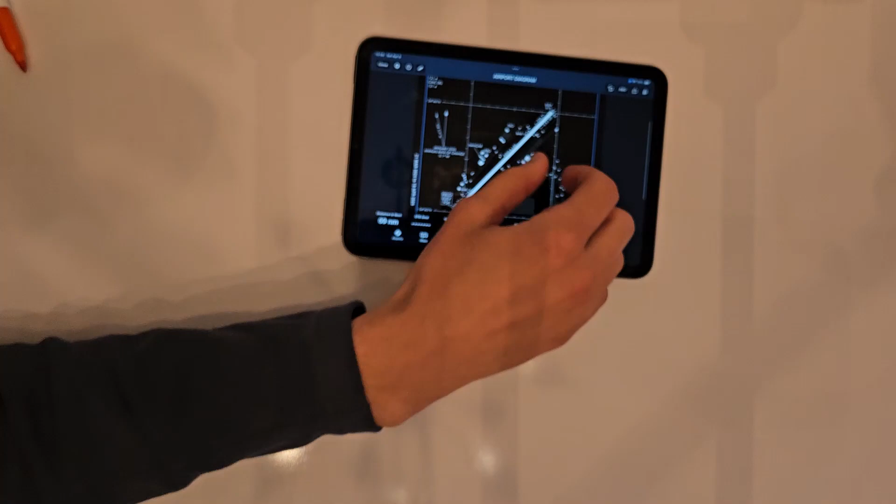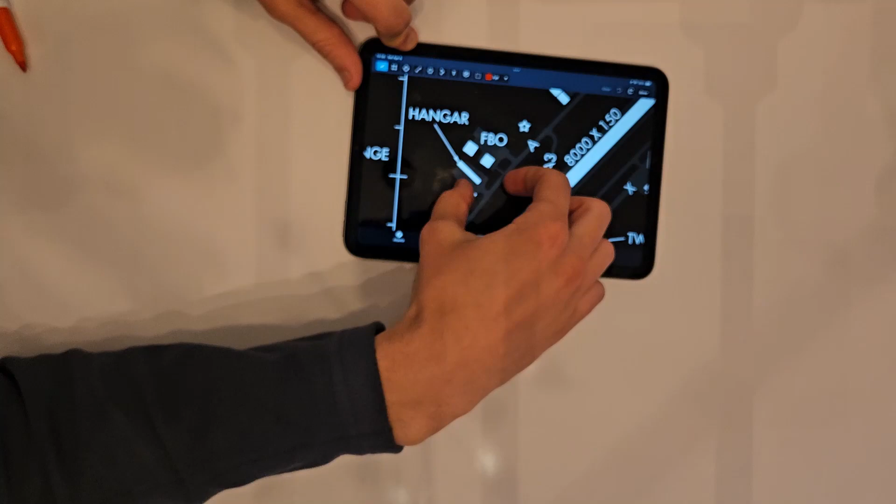I would highly recommend planning your route before you taxi. And the cool thing with ForeFlight is you can draw on your diagram. So I would mark where we're starting from. So let's say we're starting at AvServe, which is up here. Put an X. I am here. Donaldson Tower, Cherokee 12345, requesting taxi for a south departure. Donaldson Tower might read back: Cherokee 12345, taxi via Alpha 4, runway 23.

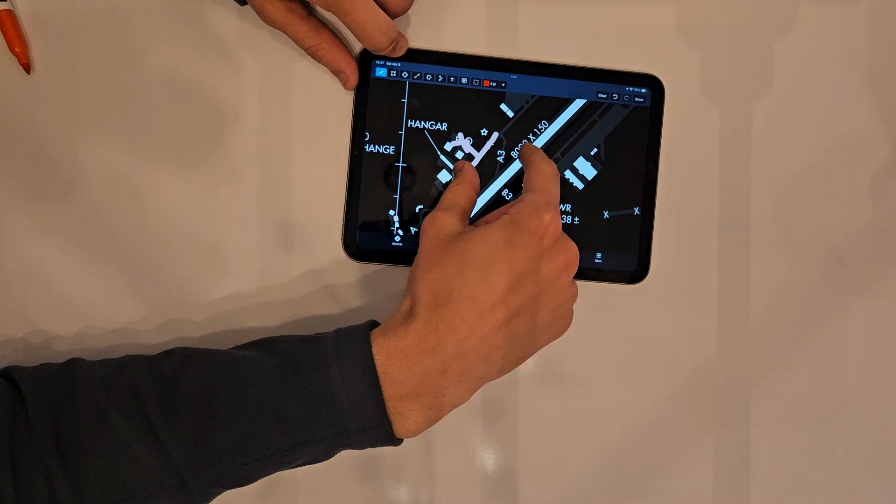So let's draw that out before we start rolling. Alpha's right here. So I need to go out. It looks like a left turn to get up to runway 23. And there's Alpha 4. And I need to stop before the runway. They didn't say to stop or hold short of 23, but we know that we need to do that. Correct. It's a taxi to. They did not say take off.

Correct. So what if you are taxiing and you realize, I have no idea where I am right now? You're looking at the taxiways out in front of you, the signs, the markings on the ground, and it just is not matching up with where you think you should be. I guess the first thing I could think of is, if you have the ability to ask ground, I would ask them where exactly you are located. Absolutely. Tell the tower that you are lost. Okay. They need to know that you're lost.

If there is confusion, you need to figure that out quickly and maybe check the color of the markings that you're on. Normally my advice would be, if you're lost, stop. But if you see white markings, well, don't go, but get back to yellow markings. Okay. And then figure out where you are. But don't just stop on a runway being confused. That's not a good place to be stopped. There are other aircraft coming in.

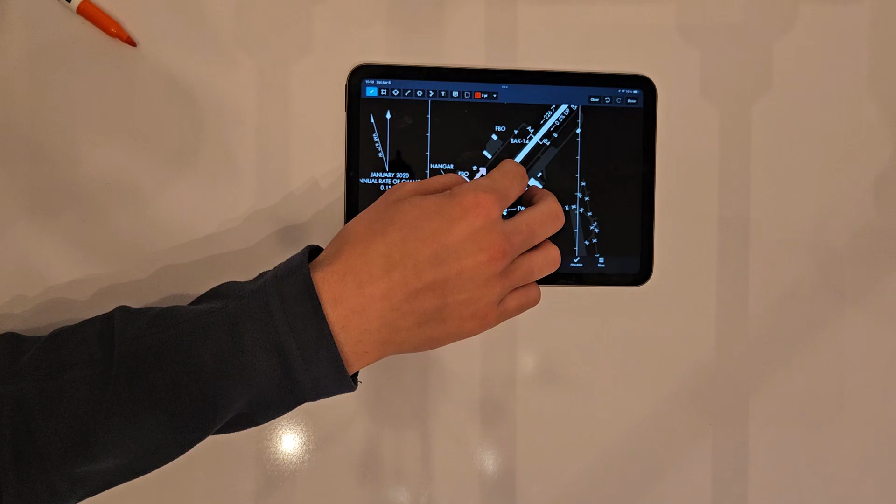Very likely. This becomes a big issue in low visibility at night. It's not super hard on a clear day, but it can happen, especially at an unfamiliar airport. You might not know where you are. So you do have another option, and that's progressive taxi. That's where tower will only give you one instruction at a time. So you can request progressive taxi for your southbound departure, and Donaldson Tower will say, Cherokee 12345, make a left turn on Alpha. And then you taxi for a while, and it'd say, okay, Cherokee 12345, make a right turn on Alpha 4. Not a big deal here at Donaldson.

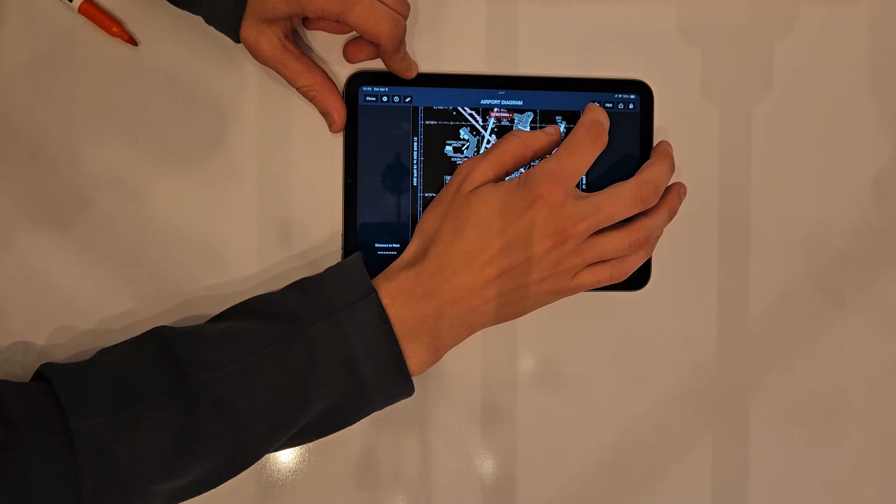Oh, I've already marked this one up quite extensively. Let's clear all those out. I like to draw out my NOTAMs too. If I know taxiways are closed, I'll scratch them out. Oh, that's good. That way I don't have to think. It declutters for me. It's something I don't have to worry about.

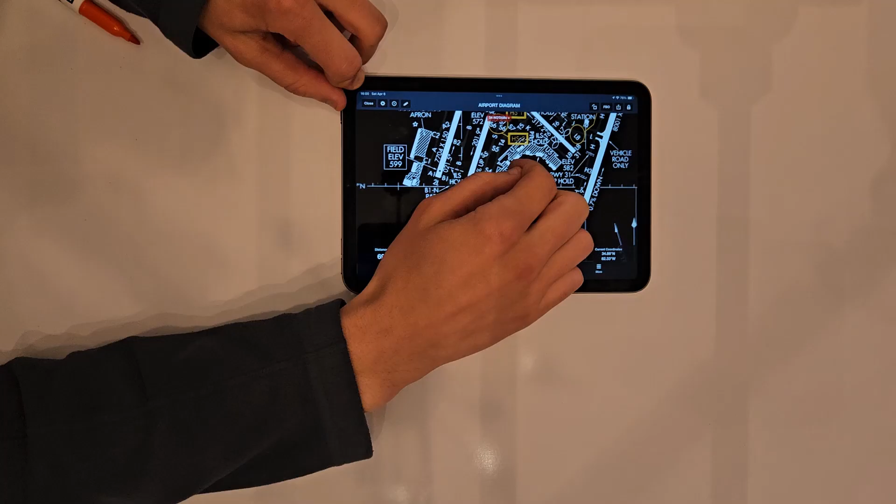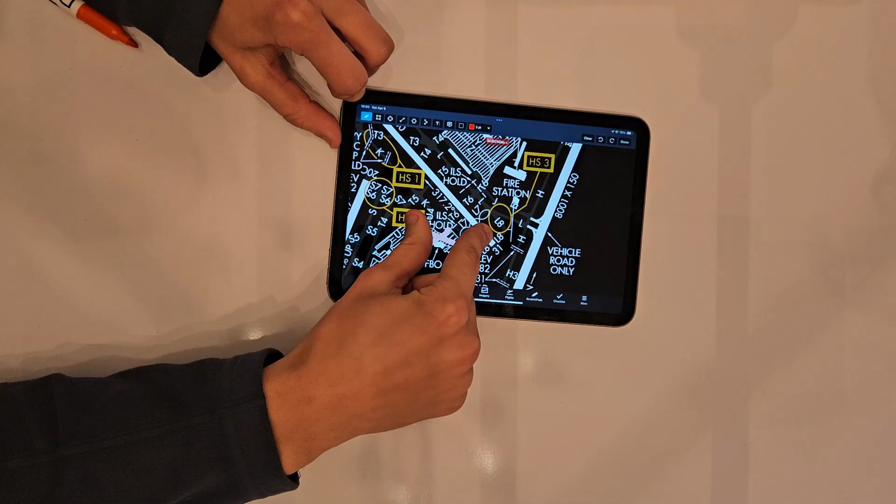But anyways, if we were landing to the right and we wanted to get to the FBO here, whichever FBO that is. So we know we're coming in to land and we want to get there. This is where some progressive taxi might be nice, because the only way to get there is to take Hotel, Lima, and then Tango 6 across, and then you might want some progressive taxi there, especially when there's parallel taxiways like this Lima and Juliet. Oh, absolutely. That could start to get really confusing really fast.

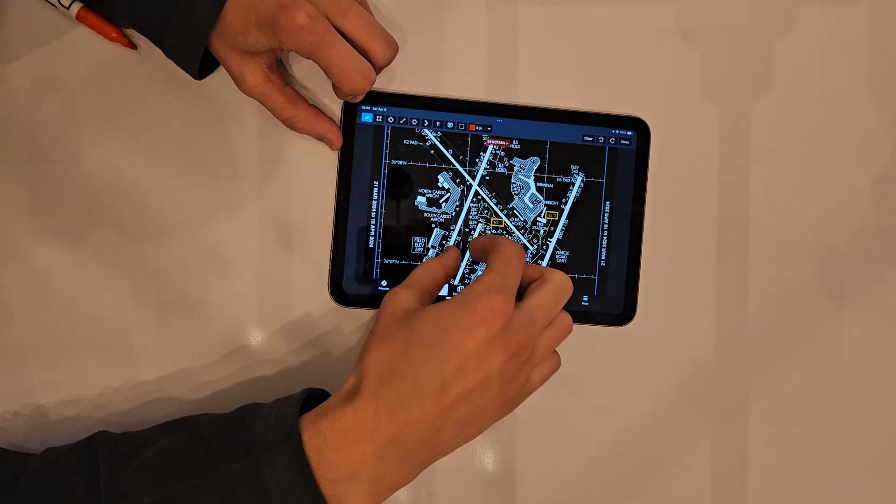And if you get big enough, they run out of letters, so they have to start putting letters together. You might have, like, Alpha Lima as a taxiway. They'd have two letters. Which airport is this? This is Nashville. Oh, wow. It's a big one.

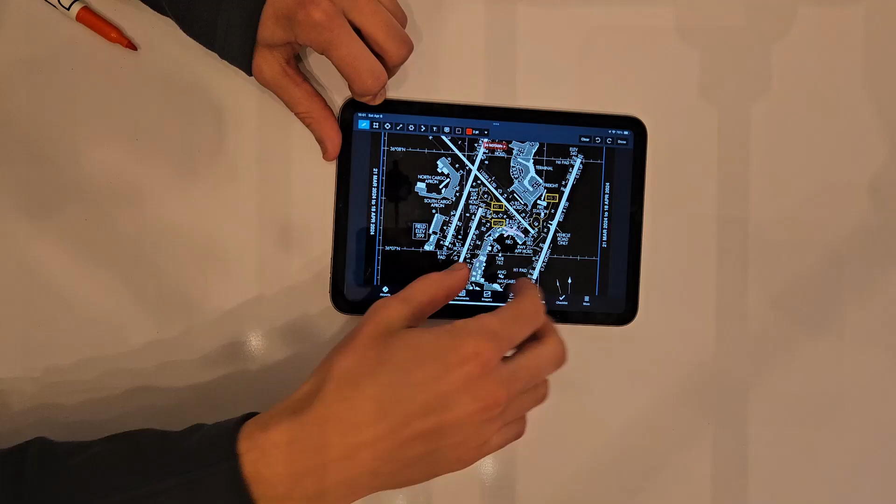Really bad would be if you landed over here and had to get over here. I guess not terrible, but you can see how it would be very easy to get confused very quickly. Now, that's a Class Charlie. Some people would say, I don't want to land at a Class Charlie. I would say to them, go land at a Class Charlie. It's good practice. Brief your hotspots.

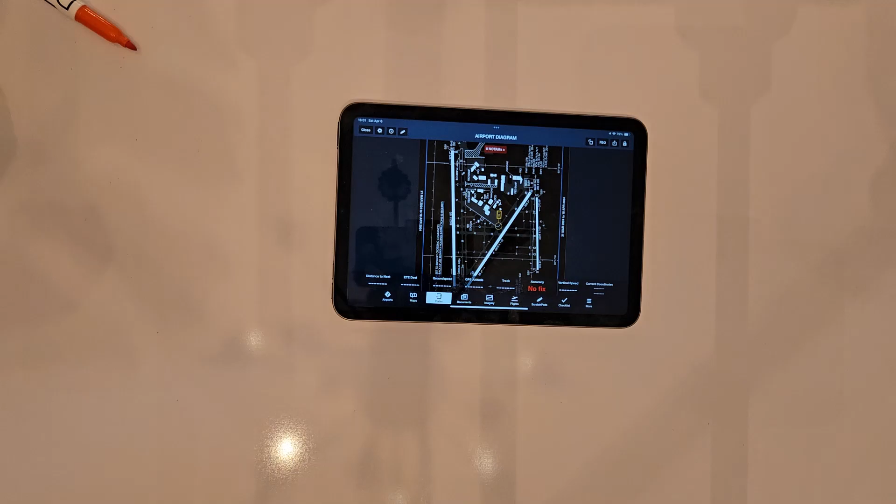If you see a hotspot like this, be aware of how confusion might happen so that it doesn't happen to you. Make sure you're keeping an eye outside on other airplanes, ground vehicles, pedestrians. Those can be unpredictable because you have no control over what the other people are doing. So keep an eye on them. There is a thing called land and hold short operations. There are hold short lines on the runways.

So they have a crossing runway. Oh, so this is when you were talking about when accidents could happen. This is exactly what I was referring to. So the way this clearance would be is you would hear in the ATIS, land and hold short operations in effect. And then let's say you're landing runway 1. They would say cleared to land runway 1, hold short 9-27. That means you're not allowed to use any of this runway up here. You only get this section up to the hold short line.

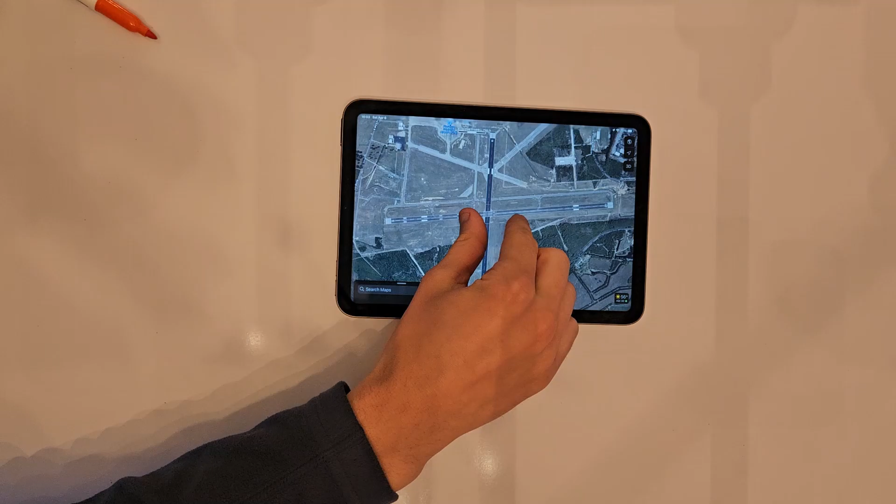As a student pilot, it is illegal for you to accept that clearance. You must say unable. Once you are a private pilot, you may. In most cases, I would say don't accept it because it puts an unnecessary pressure on you. I've heard the misconception that you're not allowed to go around if you're given a land and hold short operation. You can, but only if you absolutely have to. It puts more pressure on the landing, and that external pressure could make you do things that you might not otherwise do, like continuing an unstable or unsafe landing.

Also, you need to know for sure that your airplane has the performance and you have the capability to land in that distance. Okay, makes sense. It's hard to find. I think the easiest way to do it is to ask the tower, how much distance do I have available there? Know how much distance you need to land on that day. I know that for your Cherokee, roughly 2,000 feet would be an extremely conservative estimate. We could do it in 2,000 feet. Right. Double that. If you don't have 4,000 feet, don't accept it.

But if you do have 4,000 feet and the winds are favorable and you are feeling good that day, like you really can do it, I think there is a time and a place where that might be acceptable to do. But just be aware that a lot of charter operations and even airlines forbid their pilots from doing it. And the fact that it's illegal for a student pilot to do, it's a high risk thing. So make that decision very carefully if you're going to land and hold short. Give yourself a really conservative estimate for how much landing distance you need. Double that and let that be your cutoff if you even want to consider it.

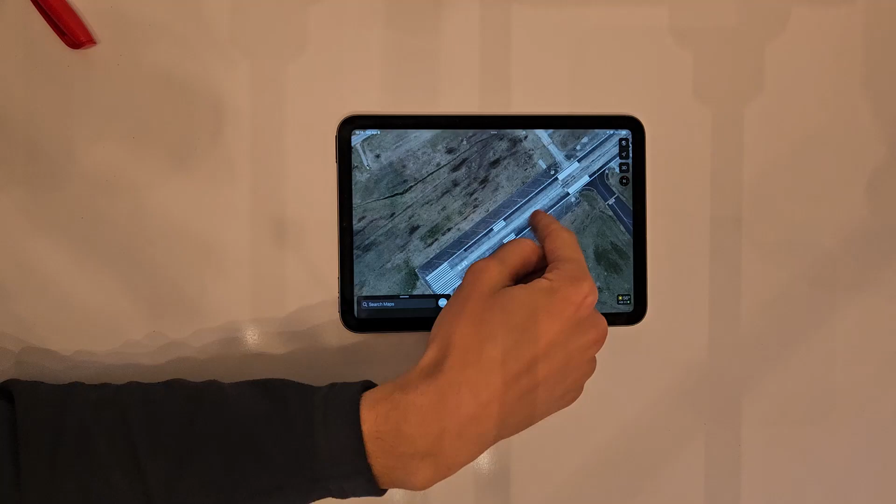So 500 feet, 1,000 feet, another 500 feet, another 500 feet, another 500, another 500. Then they don't have too many. And then there's some more. That's those runway markings. What is that?

Because here's the threshold, but there's runway back here. This is called a displaced threshold. The threshold has been moved up. They often do that because of obstacles in the way, so you don't try to fly too low on approach and hit those obstacles. But they could also do it for structural reasons.

This is an embankment that's been built up. This might not be able to handle the weight of an airplane landing. Wow. Hard. For your little airplane, it's probably not a big deal, but it is illegal. You have to touch down past the displaced threshold. It's good to know. Now, could I use this distance for takeoff?

That I'd say I'm not sure. There's a taxiway that leads onto it. So yes, you can. You can? You can use this distance for takeoff. You can taxi all the way down here and use this full part for takeoff. You're good. Just don't land in this area. You have to land in this area.

It is a special concrete designed to collapse under weight. So yes, you go into it, you will sink, and you will stop in a hurry. Like a runaway ramp. It will do a lot of damage to your plane, but you won't be going down into this road and going off the cliff. Assuming you're not going 100 knots. I don't know if it could help you then, but... I gotcha. But if your brakes failed, it would protect you.